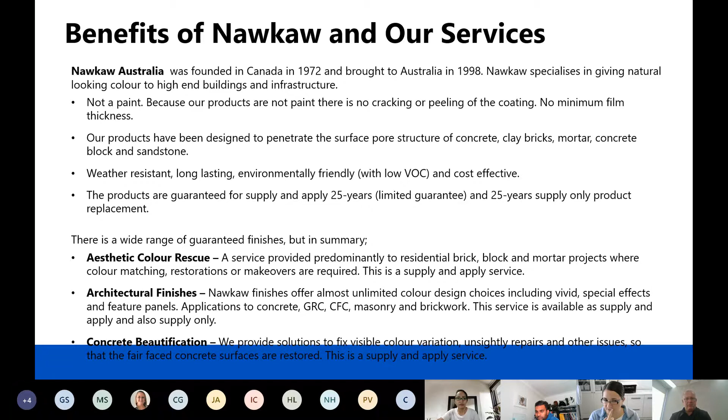So that's residential, commercial, infrastructure, and I'll try and just move through. I think the thing that defines us from a lot of other products is that we actually do the application ourselves with our own trained people or subcontractors. We offer a 25-year warranty against the product for light fastness and integrity.

There's a range of products that we have that we use to colour the walling materials - NawTone, NawTone Plus, and NawTone-G. They're all basically a polymer binder that forms adhesive bonds with the surface pore structure. They have inorganic colorants that don't break down in the sun, and the binder's been engineered to withstand the UV.

NawTone-G we would use when we're trying to get sharper colours or metallic finishes, and we also have chiefly inorganic stains, the mineral silicate sol stains.

Again, these use basically dissolved sand that reacts with the surface - either reacting with the calcium from the cement in the concrete, or forming microcrystalline silicate bonds with the surface. So that's more of a chemical bond than an adhesive bond.

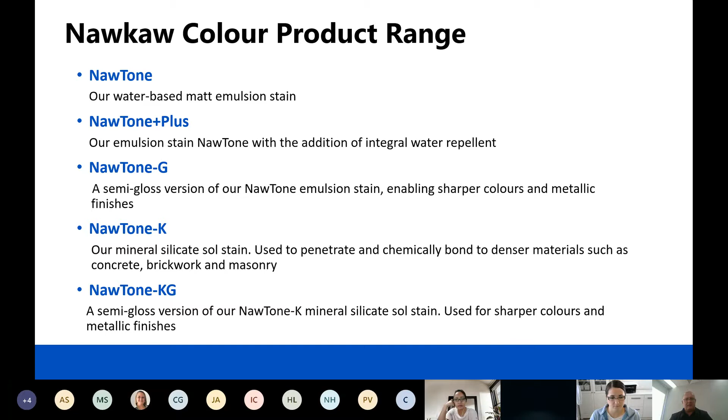We also provide sealing for moisture penetration and also graffiti management. I was going to show a couple of short videos here - one will be of the graffiti management system we have, and the first one will be our sealing. You may have seen it before.

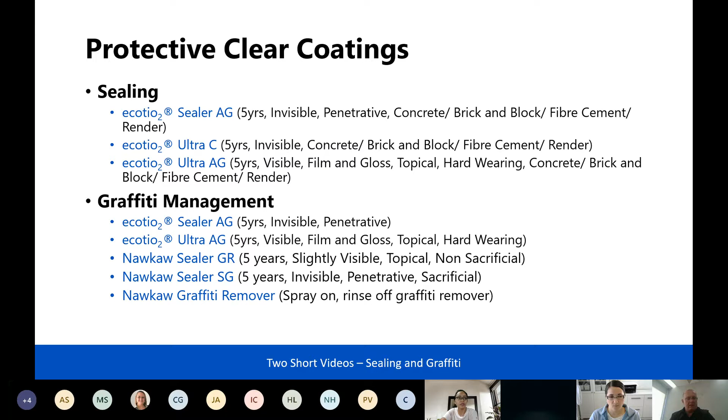Let me just go to the videos. So there's this one. Tony, you might have to share that video screen with us. Ah, okay, yeah, thanks for that, thanks for the reminder. Yeah, so you'll have to stop sharing and then reshare. Yes, yes, let me go back to. I'm going to stop sharing. So that is back in my Teams.

Where's this? Raise your hand. Where's the stop sharing button here? Just below the mic, yeah. And then I'm going to share something else. I've got to get that video open. Okay, share. Is that working? Not yet. We have this issue. What? No, it doesn't seem to be coming through. Doesn't seem to. Okay, I'll send you the links to those, to Honey.

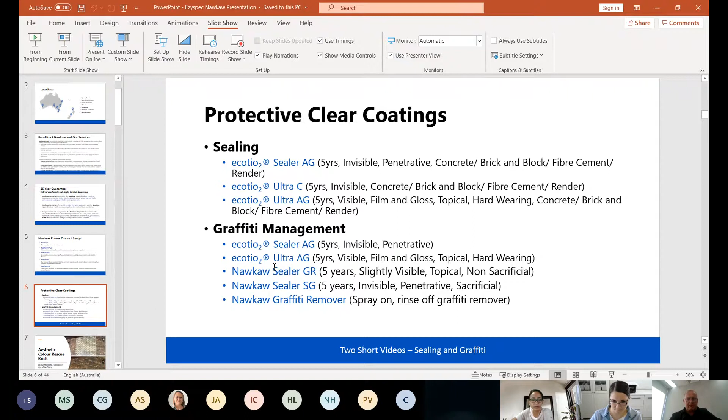We've got sealing and graffiti management that don't change the appearance of the concrete, and we have our own graffiti remover, I'll send videos of that through. But some of our products' capability is in colour rescue work. So when materials like bricks aren't available anymore and people want to build, add on or renovate, we get a lot of work like that. We also get a lot of insurance work, and a lot of manufacturers' work with batch variations that get tidied up.

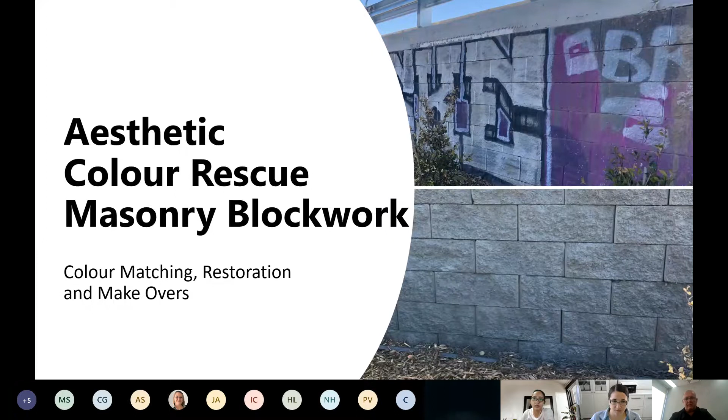We also do water colour. The stain's applied to the mismatching areas, and we can adjust the oxide blend to bring the colour into conformance. We get a lot of work also restoring original looks with split face masonry, where they try to remove graffiti and leave the shadow behind. We can come in and make it look natural again.

A lot of what we do is with architects, particularly in our own local cities — it's a bit harder to do with COVID at the moment — but we get involved at the design phase if they're trying to come up with a special look or effect. We do a lot of more 2 or 3 dimensional finishes, so they don't look like a flat paint. We could certainly make it look like a flat paint, but our products are thin film, very thin. They don't form a big thick film, and they look very natural.

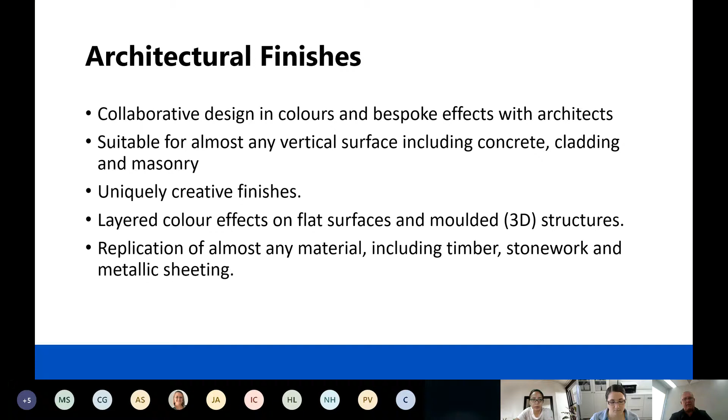So we try and build on that. We started off just being a long life paint early on, in 2006, 2007. Some of our early projects were just on grey precast here, and you'll see some opaque finishes. That one's St Leonard Square, which was finished last year.

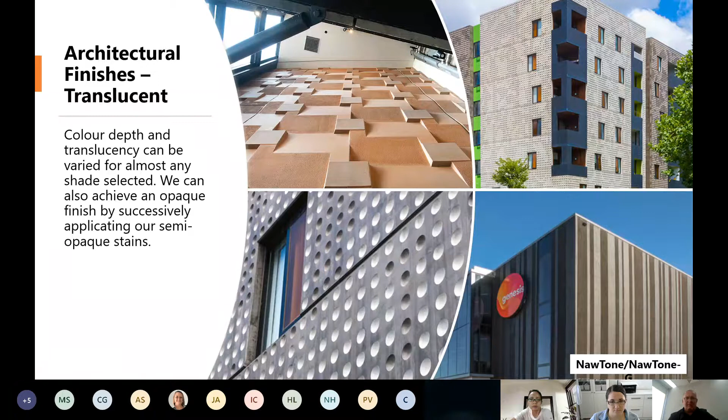We also have translucent finishes, so you can actually look through the colour to the substrate. A lot of architects like that sort of look, or they like a look with understated variation — they're not looking for a flat opaque look. Some of the translucent finishes can really absorb and reflect back the sun's light at you. They seem to have a bit more brightness than a normal coating.

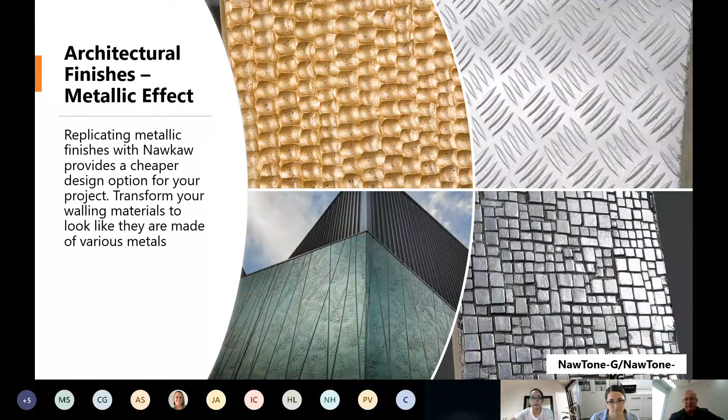We do metallic coatings as well for concrete. There's a project down in Adelaide which was just grey precast with some false joints running down to give it a bit more movement, and that had a standard copper coloured metallic stain finish over the top. We can also make things look like other metals, bronzes, weathered copper, done on moulded concrete or off-form concrete with dummy joints.

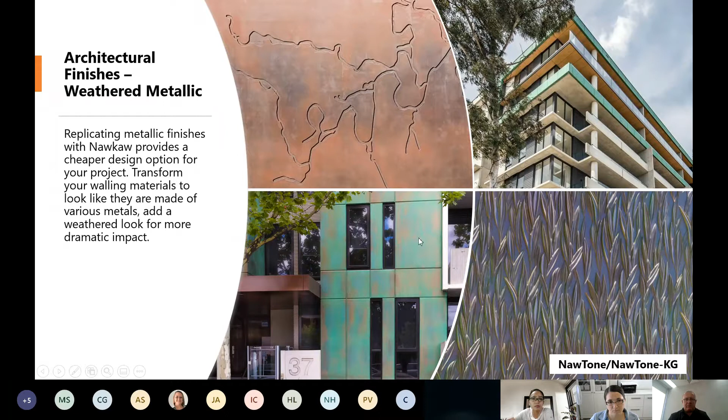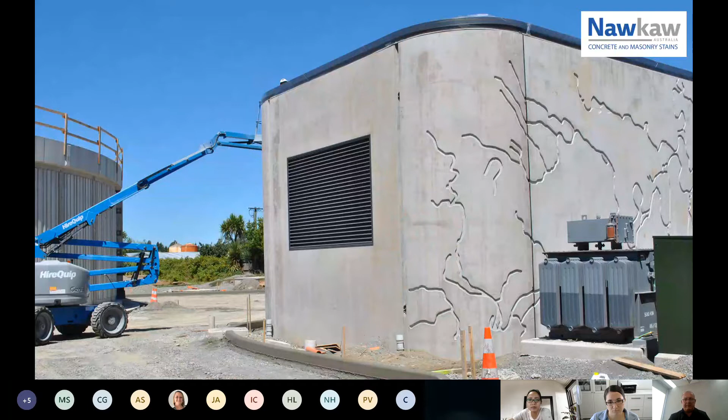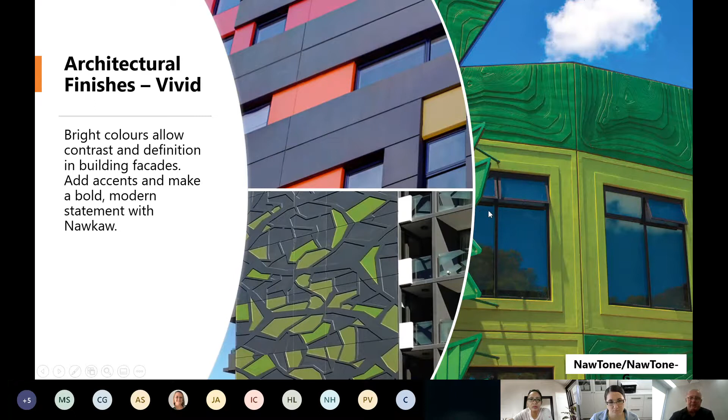An example here is a pump station in New Zealand being coated. It starts off as grey precast and ends up looking something like what the designer asked for. We do long life vivid colours as well — they typically get used to break up a boring facade or structure, or to make a statement. This one's down in Melbourne.

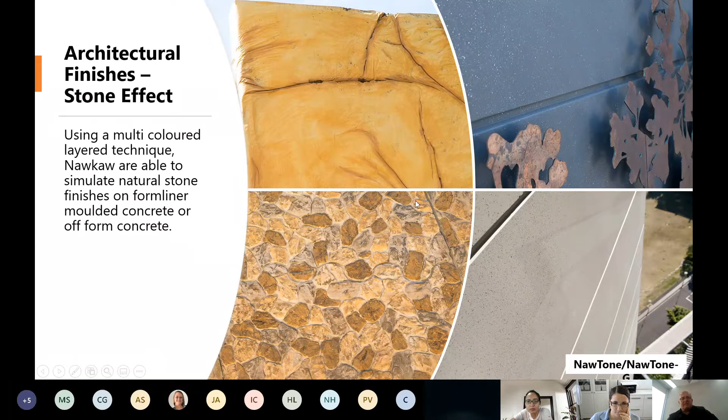We do a lot of trying to make stone. Sometimes people want to design flat surfaces with more of a stone or granite appearance, or they go to the trouble of moulding the concrete with a liner, and then we just add the colours to the grey concrete to make them look more natural.

There's a project down in Melbourne, and there's a bunch of projects going on now called Anaconda Concept Stores. The owner lives down by this surf club, saw it, and included that look in the design of these concept stores. We've just done our second one.

We do a lot of bringing concrete up to scratch aesthetically. It usually doesn't get there during the construction process, so we tend to blend out outlying colours, patches and repairs where there might be a cold joint in the formwork, leaving the concrete looking like the architect designed it.

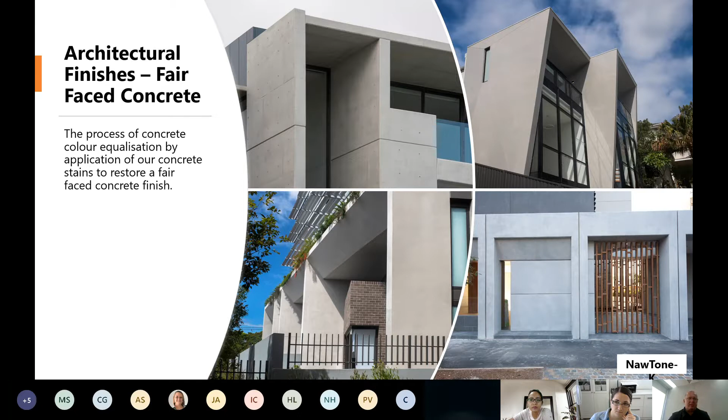There's been a big movement towards designing exteriors in materials rather than applied finishes, so we get a lot of work bridging the gap, bringing concrete back to looking fair-faced. I can send you before photos of things like this that were actually a disaster, and we brought them back to looking like a natural concrete formed set of columns that didn't have anything unusual happen to them, even though they looked much worse before.

Oh, sorry, someone's drilling on the roof.

We also do a finish like a patina. Sometimes you may have seen that specified, or an architect might ask for that. Generally speaking, if they've asked for just a plain colour and then you show them the colour in a patina, the architect tends to prefer that because it has a more natural look.

So there's a few examples. That's Eastern Creek Quarter that was just recently finished, stage 1. That was grey precast. It has been moulded and has a NawTone-K patina, a natural off-white sort of look.

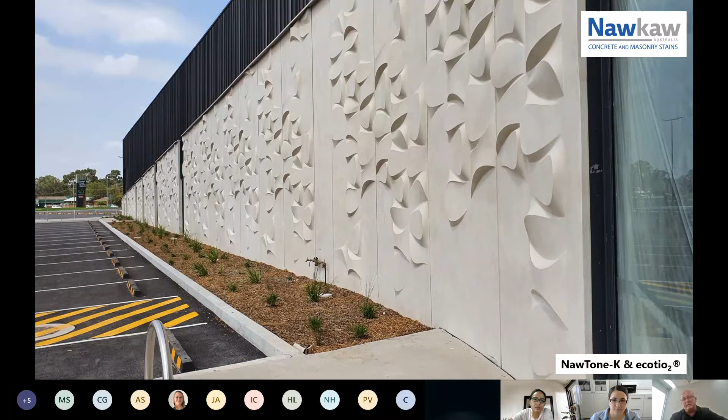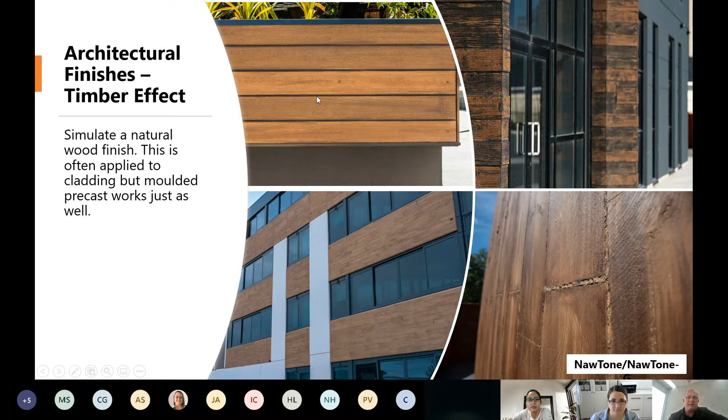We also make concrete and/or cladding look like timber, especially if you can put a little bit of form into the concrete. We just layer the colours so it picks up the grains, and in this case you can also get an express joint look where there's no joints. This is down in Collins Street in Melbourne.

That's all fibre cement, although it looks like natural timber to the untrained eye. That has the advantage of being fire compliant, being fibre cement, and we've got all our products tested to AS 1530.3, and they come up as Class A classification, so they're designed to be put near fire doors and have a good resistance to smoke and flame.

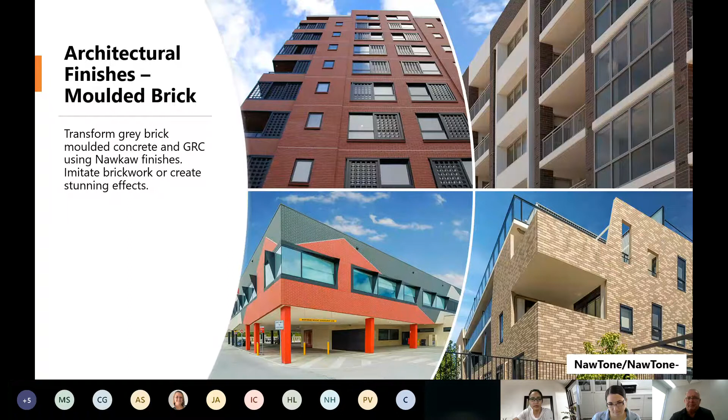These are actually precast buildings in grey concrete with a brick form liner mould in them. Some examples there. Another one down in Melbourne, public housing at Carlton.

More recently, we've adjusted our offer for lightweight walling systems, particularly fibre cement, like the James Hardie Exotec, and we can produce those finishes on site, including concealed fixing, express joints.

Here's a couple of projects where there seems to be a growing market for people who want to make their soffits that are very visible from the ground look a little bit more high end. They can put a fibre cement cladding over the rough old formed up concrete, and we can turn it into timber lined, and it's also flame compliant or non-combustible.

So it's soffits and walling with the cladding. The natural concrete look up the top here, and that can be compressed fibre cement or just normal naked fibre cement. Like in this case, this soffit was just lined in Versilux, and we applied the Nawkaw colours to simulate a natural wood finish across the soffit there.

We do a lot of work behind the scenes, and increasingly we're being asked for allowances to just bring concrete back to looking like concrete, when the architect and/or the engineer and/or the client have seen disappointing outcomes in concrete before. They ask us to give them an allowance so that it's allowed for in the project, so that concrete can actually end up looking like concrete.

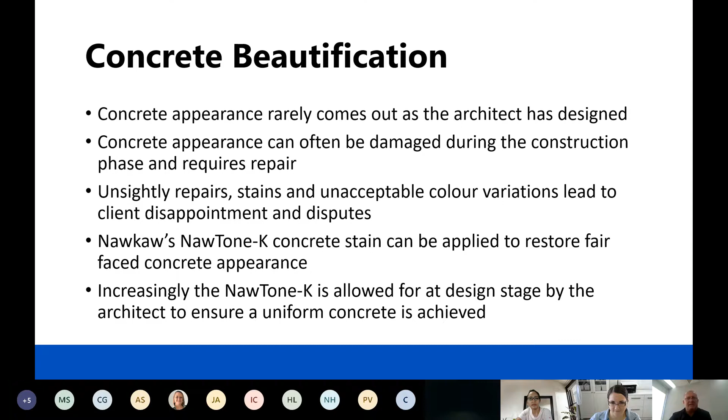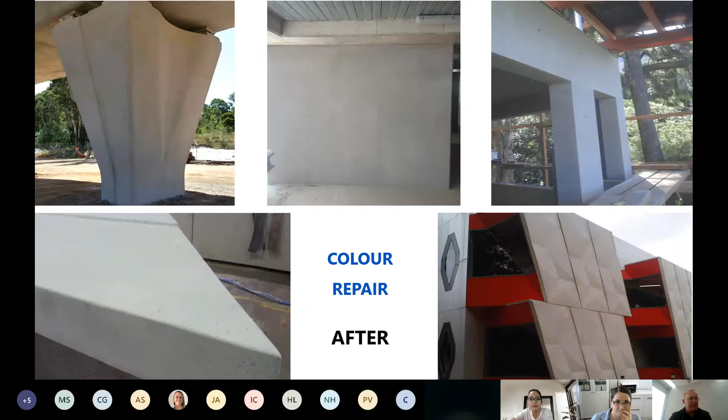So there's some examples here where we've been called in. You've got the standard patch repair that the formwork will say meets class 2. You need to pay me, I'm not fixing that. And we come back in and can blend things and leave them looking like natural fair face concrete. We've sent through a PowerPoint on just that subject earlier.

More recently, since 2016, we've been offering photocatalyst coatings, which we spoke to you guys about before, on top of our Nawkaw coatings to preserve the as-new appearance, to stop streaking coming down off parapets and flat surfaces, and to stop dirt and mould accumulating over time.

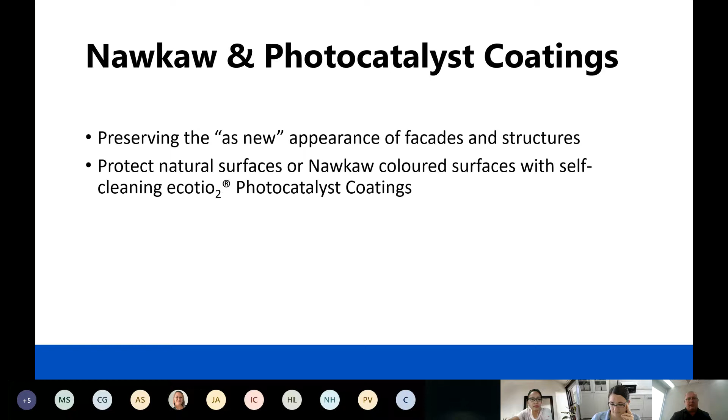So there's some examples. This project here had all the concrete elements coated with photocatalyst after the Nawkaw coating went on. Similarly with the soffits.

This is ARC by Crown, and this was all precast concrete. The architect, Koichi Takada, was very aware that he wasn't going to get a continuous look of even concrete from the precaster, and he certainly didn't want streaks coming out of the fixings where water would concentrate and run dirt down from these mouldings that went over the outside of the precast.

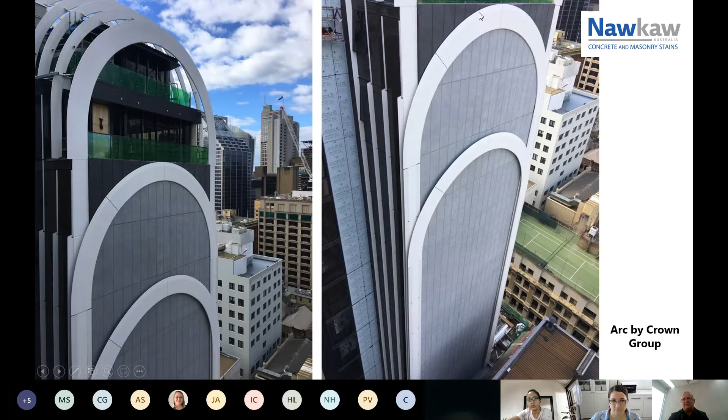So all of this, and this dark surface up here, has the photocatalyst on top of the Nawkaw stain.

We're getting a fair bit of repeat work out of Macquarie University as well, where they've got some brutalist concrete buildings built in the 80s through their campus. They were designed to probably catch a lot of dirt with a lot of ledges there.

Uncapped parapets - you can see the black mould starting to colonise in the concrete as it's been carbonated over time. There's a lot of trees overhead here, so the buildings look pretty shabby, and they've started building new buildings at Macquarie, and they wanted to start tidying up the old.

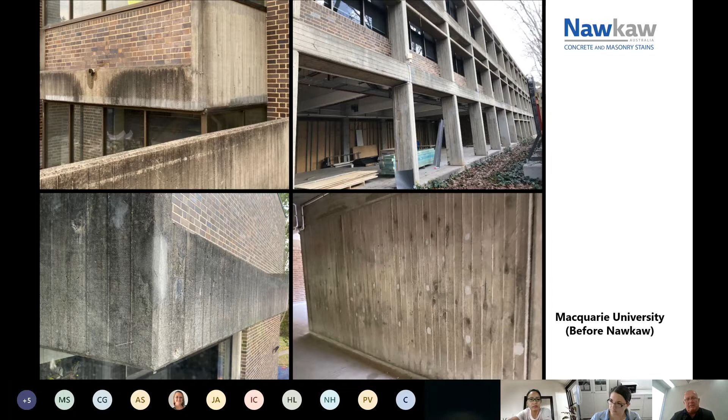So we go in and clean the mould out. We poison it - put something in to prevent the mould from coming back from below. We then put a NawTone-K coating over the top of the weathered concrete, and that actually consolidates the weathered surface because of its microcrystalline bonds with the sand particles there. It also binds an oxide that's light fast.

And then we've overcoated that with the photocatalyst coating that doesn't change its appearance, but gives the facade the ability to decompose mould and dirt and stay looking like new. We're about to start the main library building at Macquarie Uni, the same sort of concrete - they're just deciding on the final colour.

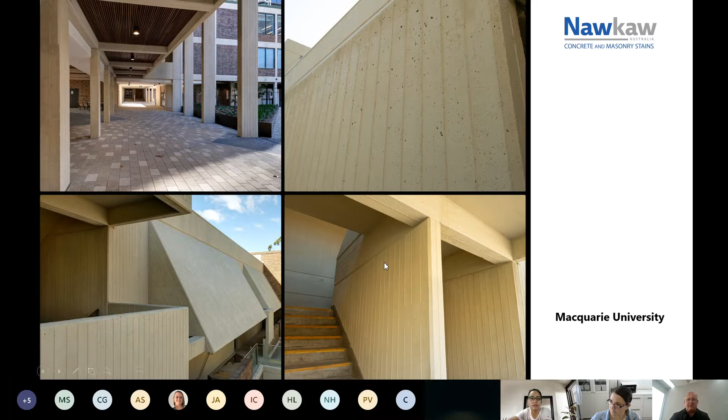And also this is partway through the Second Ponds Creek segment of Sydney Metro Northwest SkyTrain, where all their piers weren't meeting their aesthetic requirements. So you can see they've got the Nawkaw stain going on through there. In the end, they got us to stain the viaduct for this section and the parapet panels and put photocatalyst on everything.

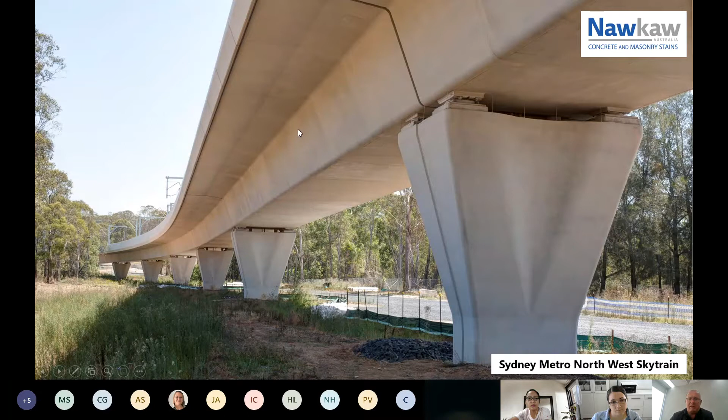So there's a before and after. That's the end of the slideshow that I have.